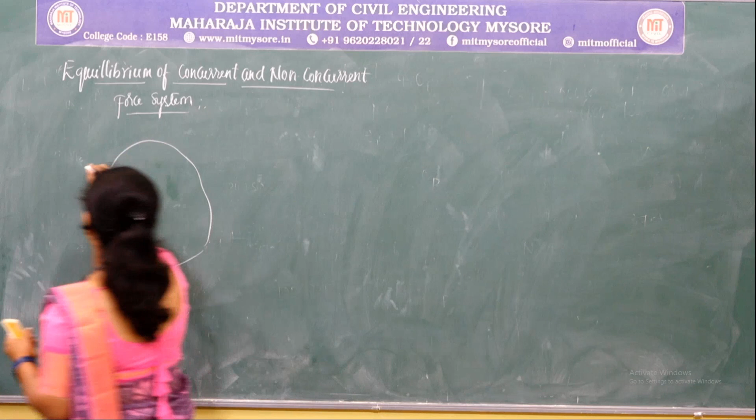So, for that, if I consider a system of forces or a body, let us consider a body. This is the static position of this body. So, I am going to apply some of the forces on this body. Upon applying these forces, if the position of this body is not altered, that means it does not move upon the acting of these forces, then this body is said to be in equilibrium.

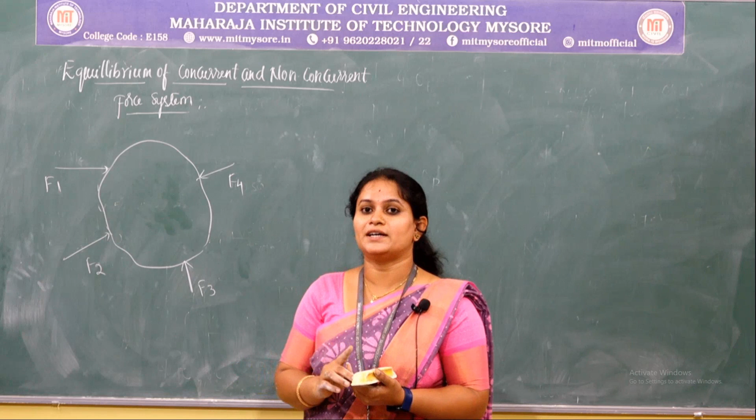So, if I consider the bodies which are in motion, the body is moving with the uniform velocity, and on applying some of the forces on that body, if the uniform velocity of that body is not altered, then that body is also said to be in equilibrium.

So, mostly this concept of equilibrium will be applied for the static bodies. So, a body is said to be in equilibrium when its static position means which is not moving, so which is at rest.

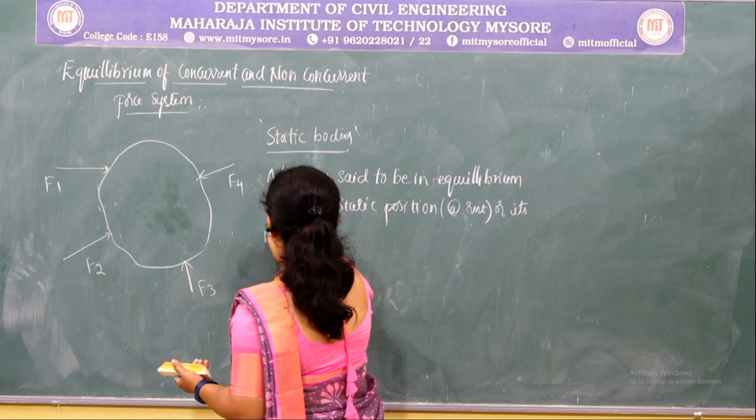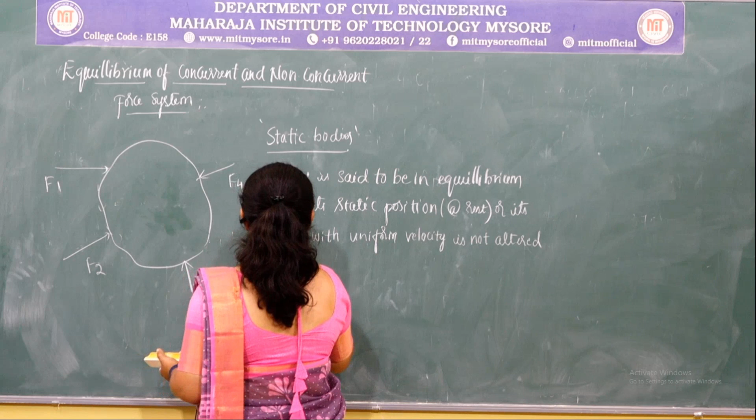When its static position or motion with uniform velocity is not altered when it is acted upon by the different forces, so this is called as the equilibrium of a body.

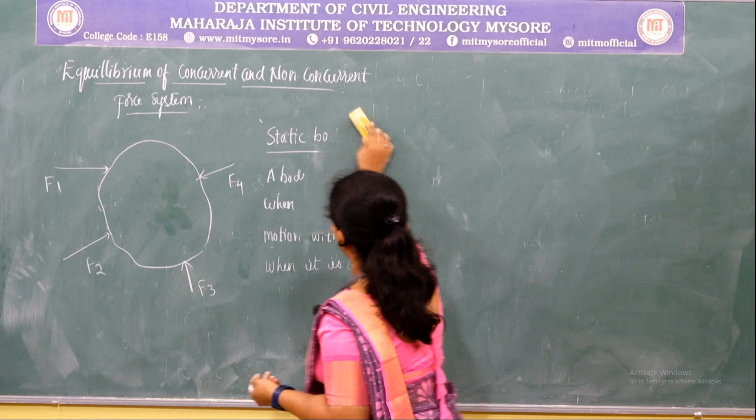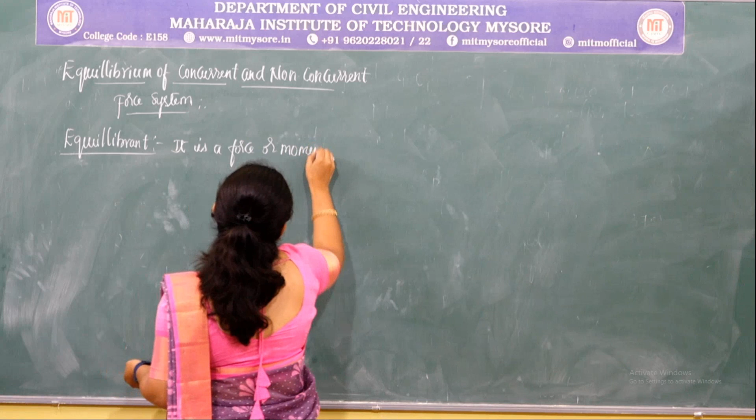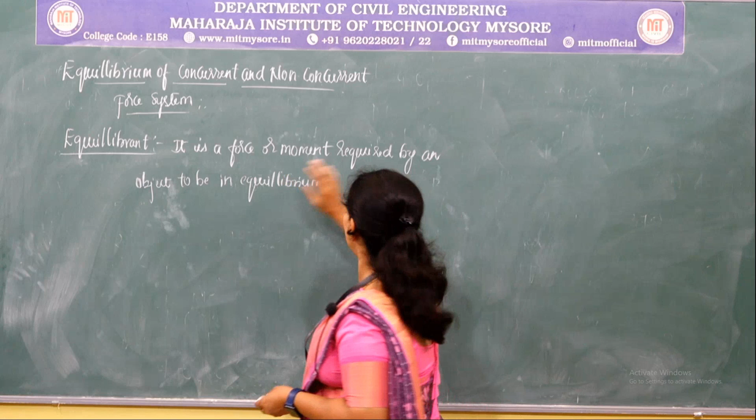Next, we shall consider the equilibrant. So, what do you mean by this equilibrant? This equilibrant is a force or a moment required by an object to be in equilibrium. So, this equilibrant is a force which is required by an object in order to keep that object in an equilibrium.

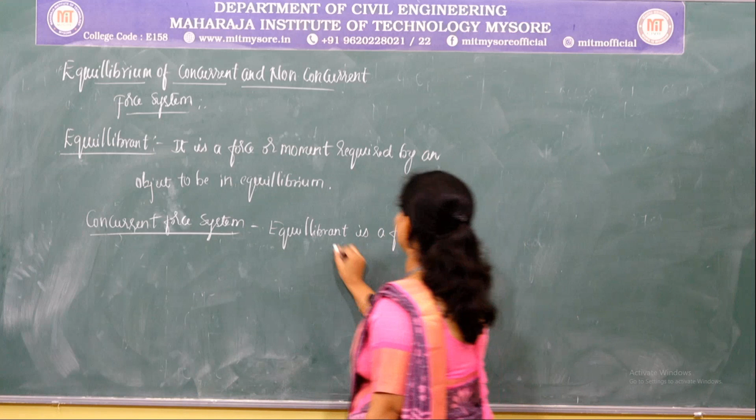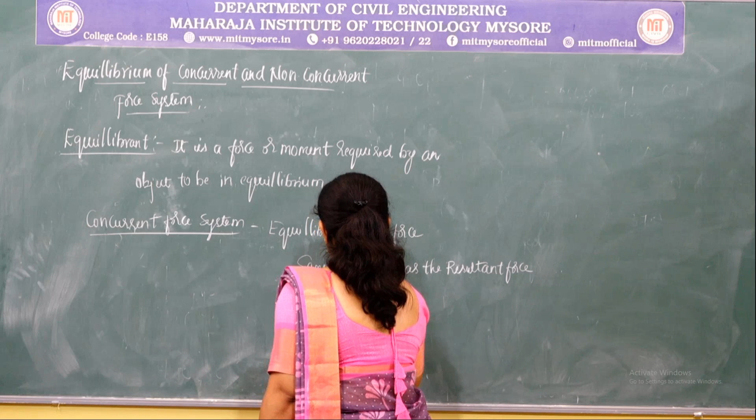So, there are two cases. One is for concurrent force system. So, for this concurrent force system, equilibrant is a force which is having the same magnitude as the resultant force, but in opposite direction. Why it is in opposite direction? Because this needs to keep the object to be in equilibrium.

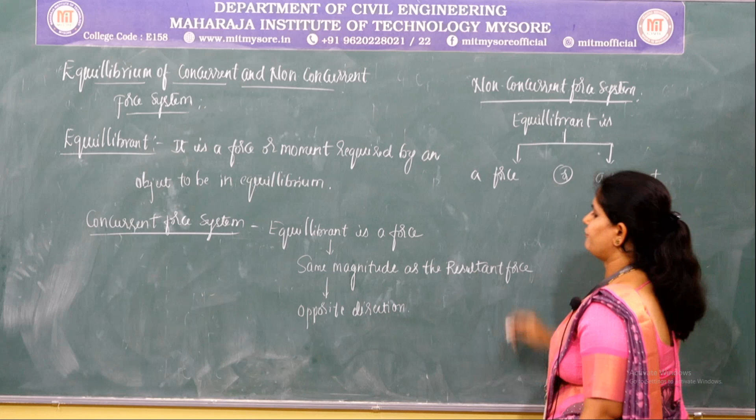So, for non-concurrent force system, this equilibrant is a force or a moment. If it is a force, this should have a same magnitude as resultant, again in opposite direction. If in this case the value of the resultant is 0, so this equilibrant may be a moment.

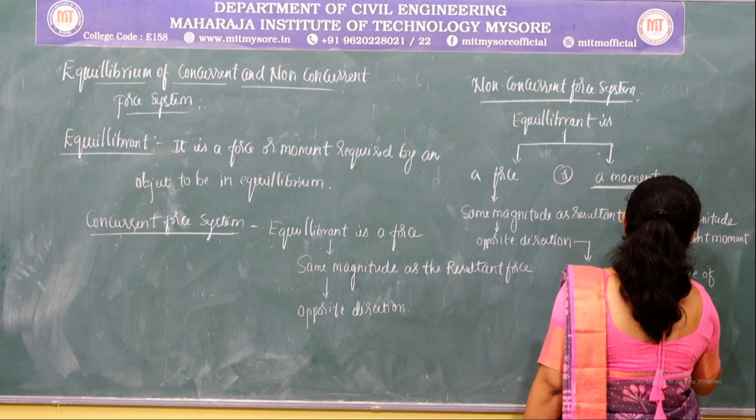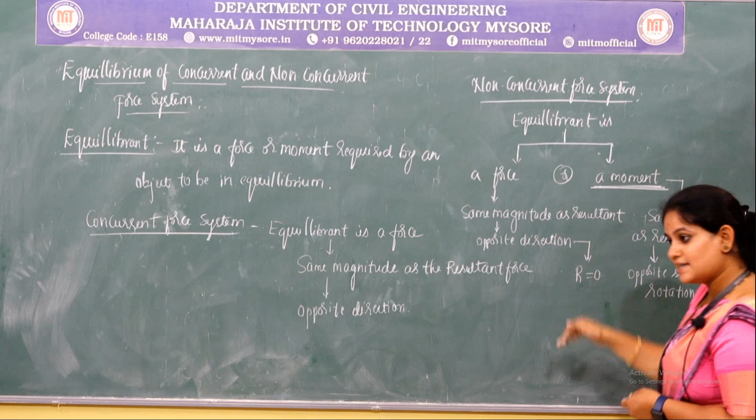Again this should have the same magnitude as resultant moment, again this should be in opposite sense of rotation. So, if the value of resultant is equal to 0, then the equilibrant will be a moment which is having the same magnitude as the resultant moment, but in opposite sense of rotation.

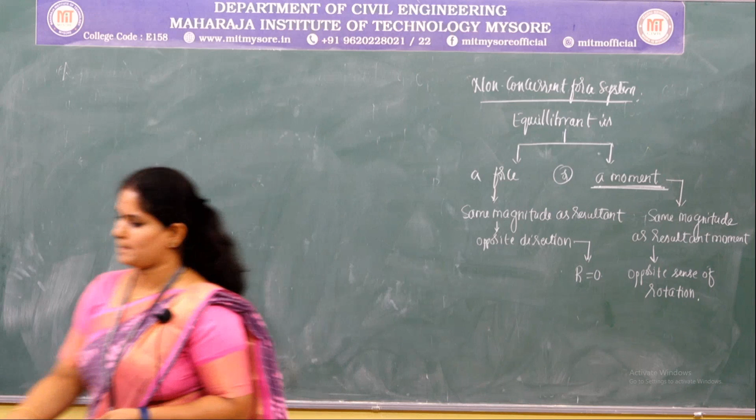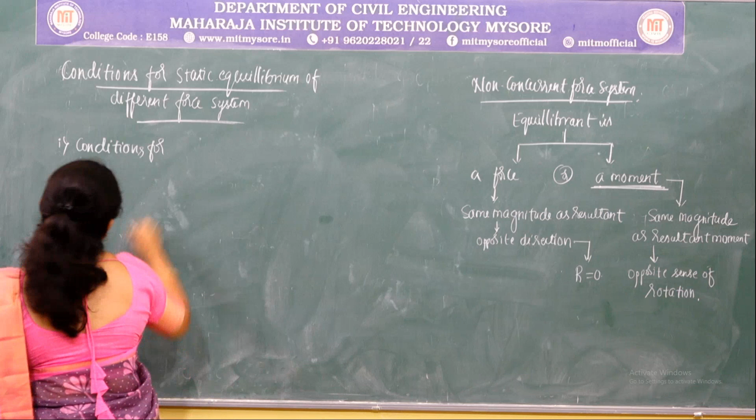So, next we shall consider the conditions for static equilibrium of different force system. So, in that the first condition is conditions for equilibrium of coplanar concurrent force system.

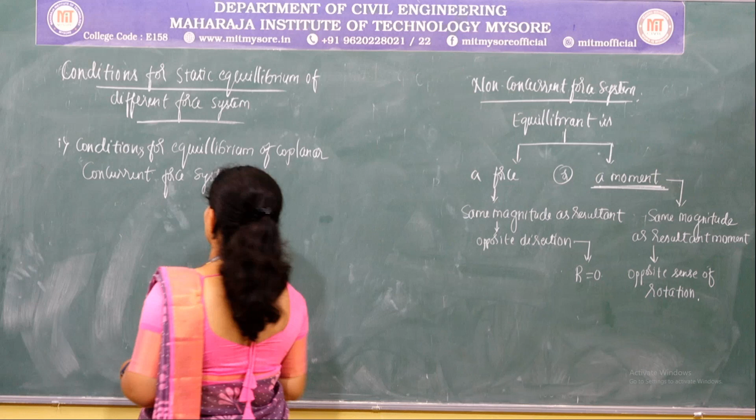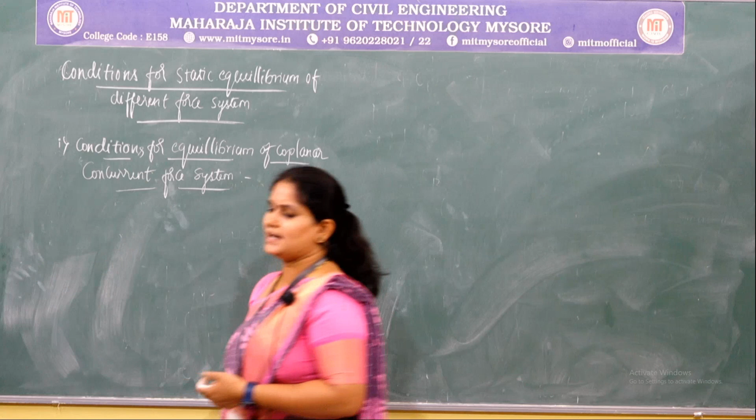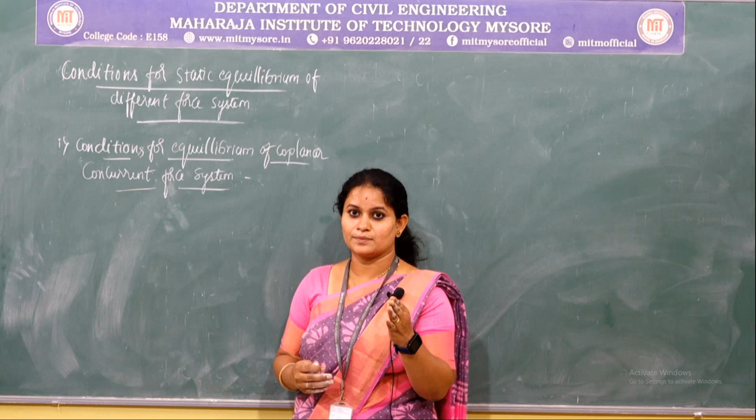So, when I am explaining about the equilibrium, I told you that in case of concurrent force system, equilibrant is a force only. So, therefore, the resultant of the concurrent force system is a force which is acting through the point of concurrence of the given system of forces, and it must be equal to 0. That means which is nothing but a resultant force.

In order to find out the resultant force, we need summation of Fx and summation of Fy. So, in order that the concurrent system to be in equilibrium, these two cases should also be in equilibrium. That means summation of Fx should be equal to 0 and summation of Fy should be equal to 0.

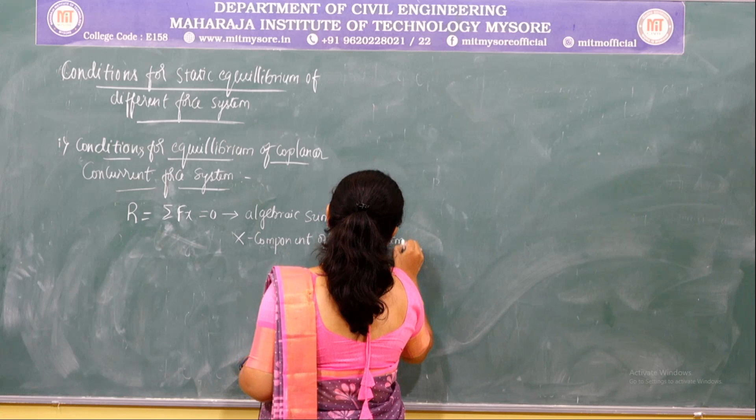So, summation of Fx is equal to 0 means that the algebraic sum of all the x components of a force system is equal to 0, and summation of Fy is equal to 0, which means that

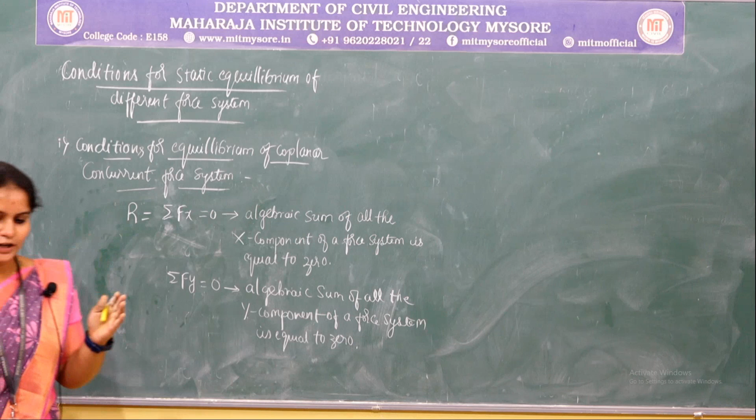the algebraic sum of all the y components or the vertical component of a force system is equal to 0. If both these components are equal to 0, then the given system of forces or the concurrent force system will be in equilibrium, because that object or the force system should not move, right.

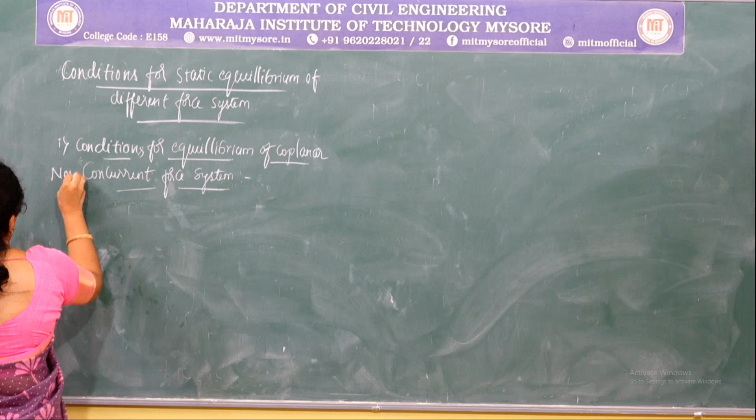Next, in the second case, we shall consider the conditions for the equilibrium of coplanar non-concurrent force system. So, again for non-concurrent force system, I told you that equilibrant may be a force or a moment. So, this will going to constitute the conditions that for force, that is summation of Fx is equal to 0 and summation of Fy is equal to 0, or if in case the resultant force is 0, this will going to constitute for the moment as a resultant.

So, that means summation of the moment should be equal to 0. So, this means that the algebraic sum of all the x component of a force system is equal to

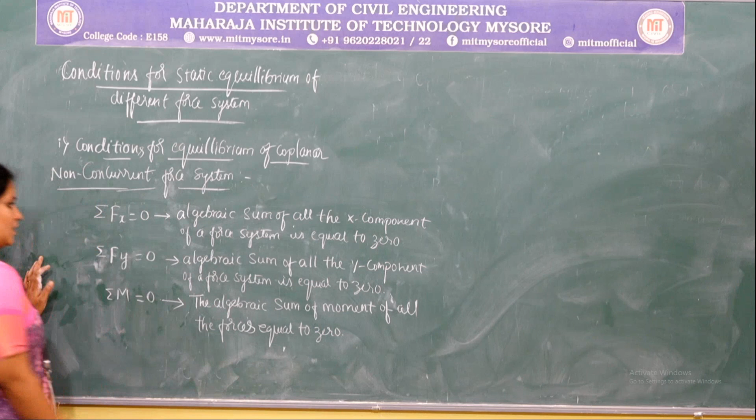0, and the algebraic sum of all the y components of a force system is equal to 0. So, summation of moment, the algebraic sum of moment of all the forces is equal to 0.

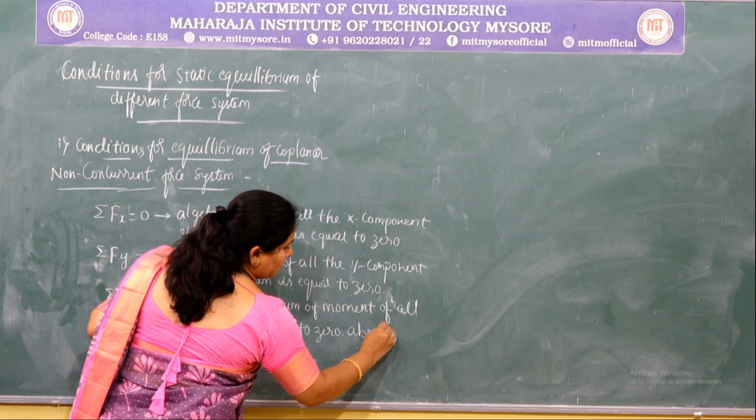Then we should use these three conditions for the equilibrium of coplanar non-concurrent force system, and should be equal to 0 about any point. So, these are the conditions of static equilibrium for different force system. Next, we shall consider the Lami's theorem.

So, we shall take up the first concept, that is Lami's theorem.

So what does Lami's theorem say? It states that if three coplanar concurrent forces are in equilibrium, then each force is directly proportional to the sine of the angle between the other two forces.

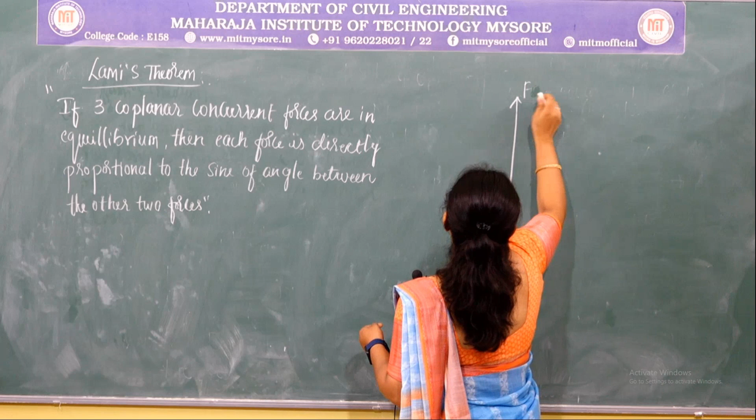So to prove this, let us consider three coplanar concurrent forces in equilibrium. Let us consider F1, F2 and F3 as three concurrent forces. The angle between F2 and F3 is alpha, the angle between F3 and F1 is beta, and the angle between F1 and F2 is gamma.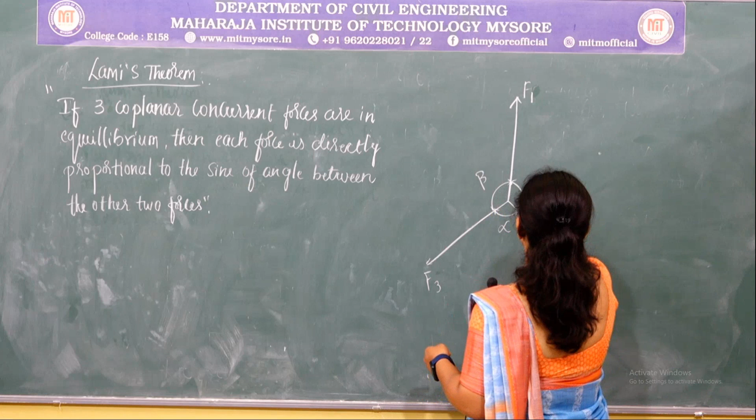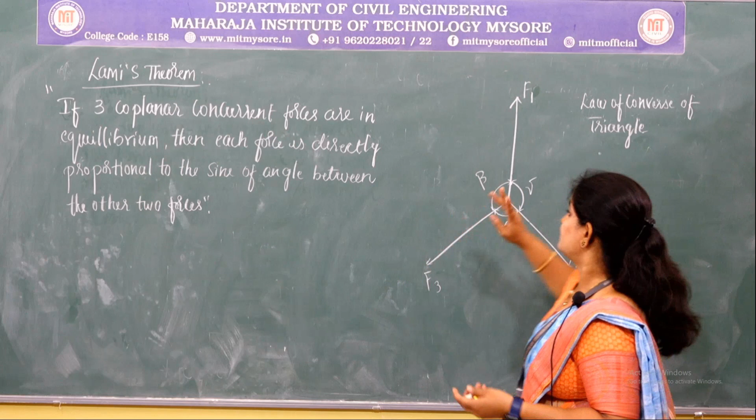When these three forces form a coplanar concurrent force system, they can be represented by the sides of a triangle, both in magnitude and direction, based on the law of converse of the triangle. This means when three concurrent forces are in equilibrium and coplanar, these three forces can be represented by the sides of a triangle both in magnitude and direction. So let us draw the figure.

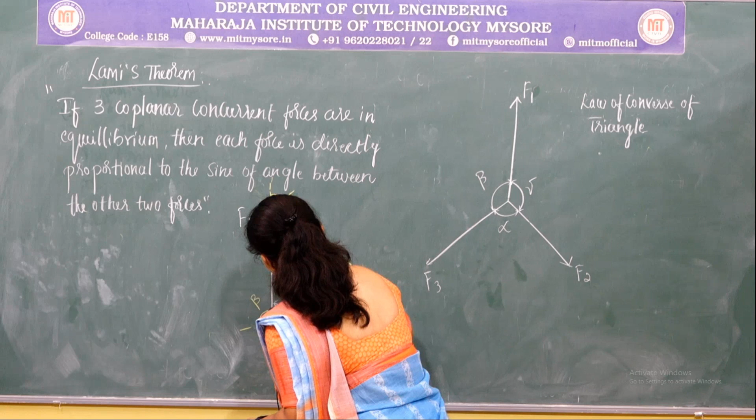So this is F1, drawn in the same direction. This is the direction of F2 and this is the direction of F3. The angle between F1 and F2 is gamma, the angle between F2 and F3 is alpha, and the angle between F3 and F1 is beta. So the interior angles: since the total angle is 180 degrees, this becomes 180 minus gamma, this becomes 180 minus alpha, and this becomes 180 minus beta. Now we shall apply the sine rule.

What does this sine rule say? If the three forces are represented as sides of a triangle, then each force is directly proportional to the sine of the angle between the other two forces. So we shall apply the sine rule for this figure 2.

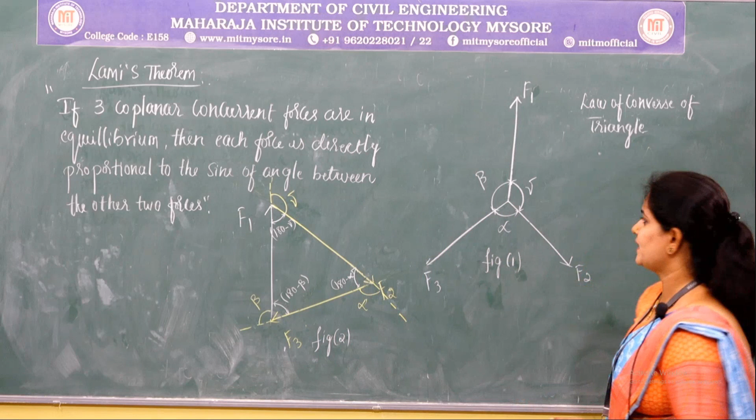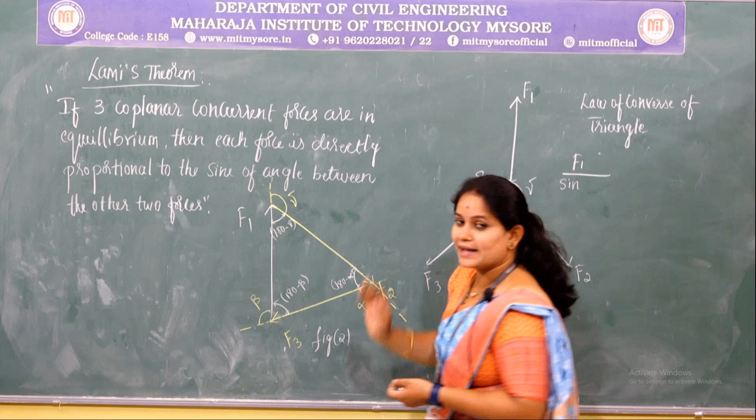On applying the sine rule for figure 2, first consider the magnitude of the first force, F1. This F1 is directly proportional to the sine of the angle between the other two. What is the angle between the other two forces now? For F1, we consider the angle between F2 and F3, which is 180 minus alpha.

Similarly, consider the second force F2, which is directly proportional to the sine of the angle between the other two. Now considering F2, I need the angle between F1 and F3, that is 180 minus beta.

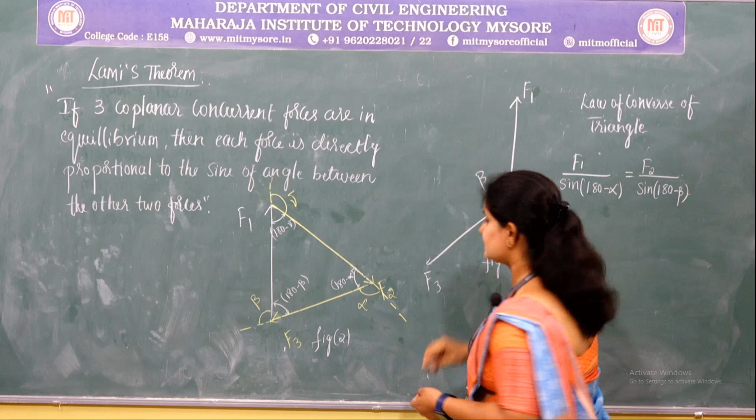And this is equal to the next force, F3. Considering F3, I need the angle between the other two forces, F1 and F2, that is 180 minus gamma. So this is equal to some constant.

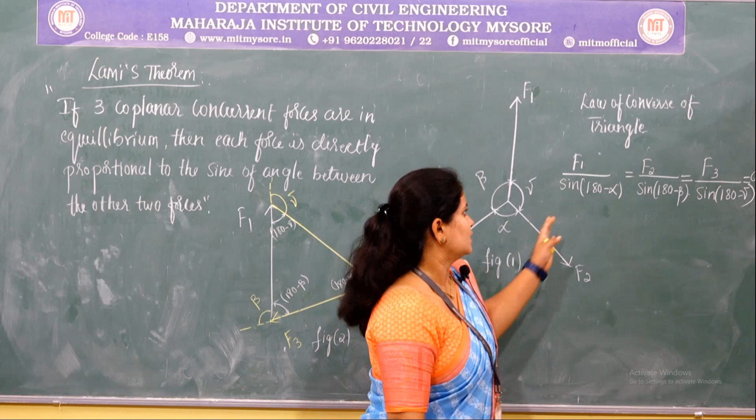So what is sine of 180 minus alpha? It is sine alpha, which is equal to F2 divided by sine of 180 minus beta, which is sine beta, and F3 divided by sine gamma, which is equal to some constant.

So this can be written as F1 is equal to some constant multiplied by sine alpha, or F1 is directly proportional to sine alpha. Similarly, F2 is directly proportional to sine beta, and F3 is directly proportional to sine gamma. Hence proved.

Which means to say that if three coplanar concurrent forces are in equilibrium, considering F1, F2, F3 as the three forces which are coplanar and concurrent, each force is directly proportional to the sine of the angle between the other two forces.

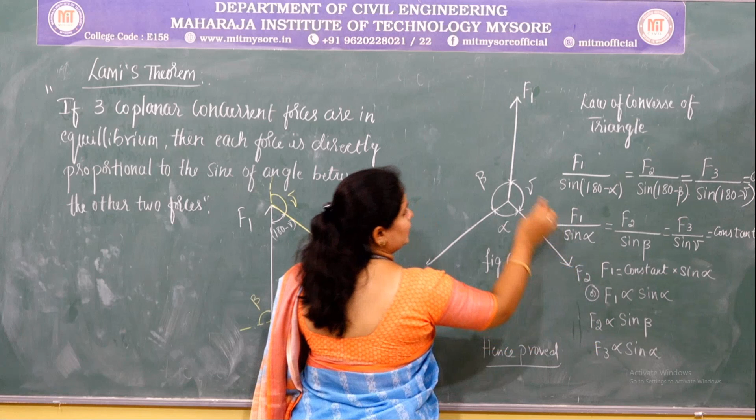Observe here in figure 1, if I consider F1, this is directly proportional to the sine of the angle between the other two forces, that is alpha, and F2 is directly proportional to the sine of the angle between the other two forces, that is beta, and F3 is directly proportional to the sine of the angle between the other two forces, that is gamma. Hence Lami's theorem is proved.

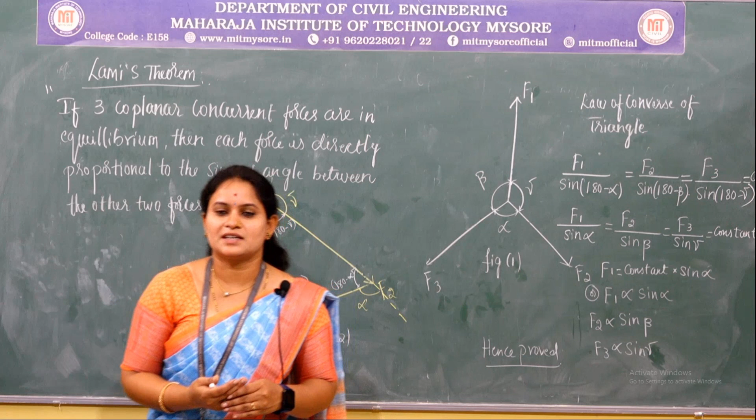So let us discuss the next topic, that is the free body diagram. What do you mean by a free body diagram? The free body diagram of a body, or a part of a body, is the diagram which shows all the forces acting on the body, keeping that body in equilibrium, including the support reaction at the restraint point and the self weight of the body. So what is a free body diagram?

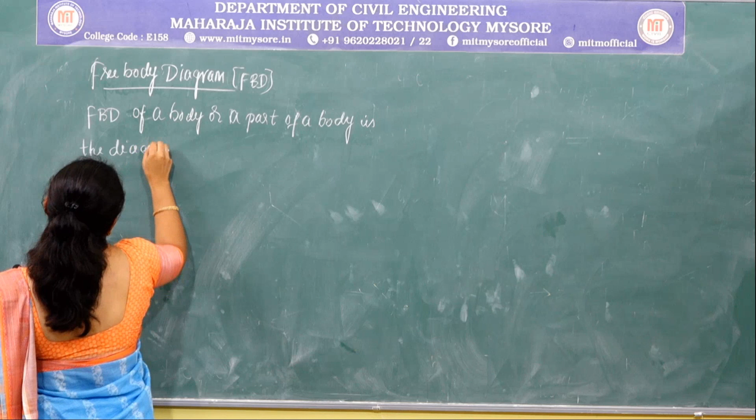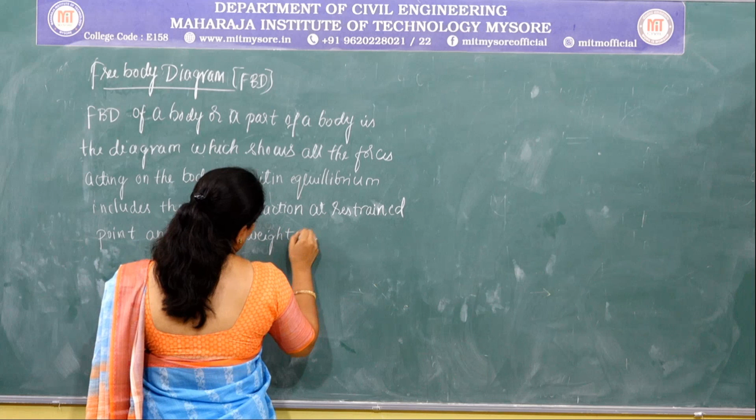Free body diagram, which can be written as FBD, of a body or a part of a body is the diagram which shows all the forces acting on the body, keeping that body in equilibrium, which includes the support reaction at restraint points and also the self weight of the body. So, in order to explain this free body diagram, let us take up one example.

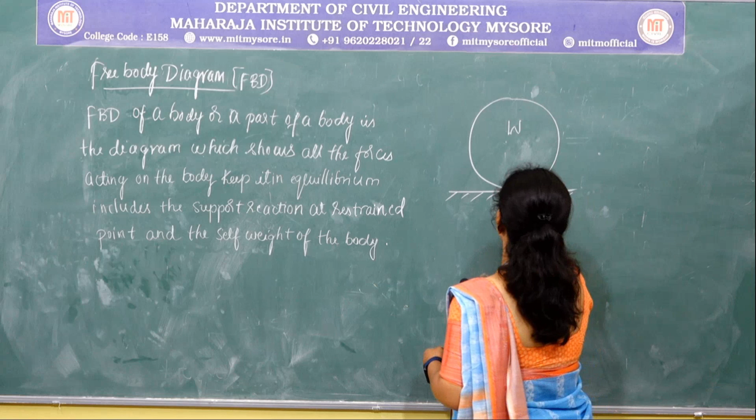Let us consider a sphere which is having the self weight of W and supported by a smooth surface at point A. If this sphere is not supported by this surface, this sphere would have sunk into the surface. That means the motion of this sphere is restricted by this surface at point A, that is, this sphere is applying some action towards this surface. For the action developed, this point on the surface is developing the same reaction towards this sphere.

So this point is called the restraint point, and the reaction developed towards the sphere is called the support reaction, or it is also called the normal force or the reaction force. So the free body diagram of this sphere can be written as: the self weight of the body will act in vertically downward direction, that is W. This point is restricting the motion of the sphere at point A, hence the surface is developing some reaction towards this sphere. Hence, at point A, there is a support reaction developed which can be represented as R, that is reaction at point A.

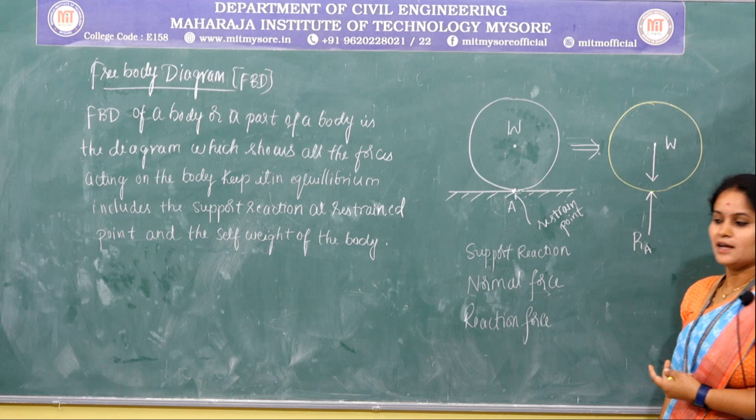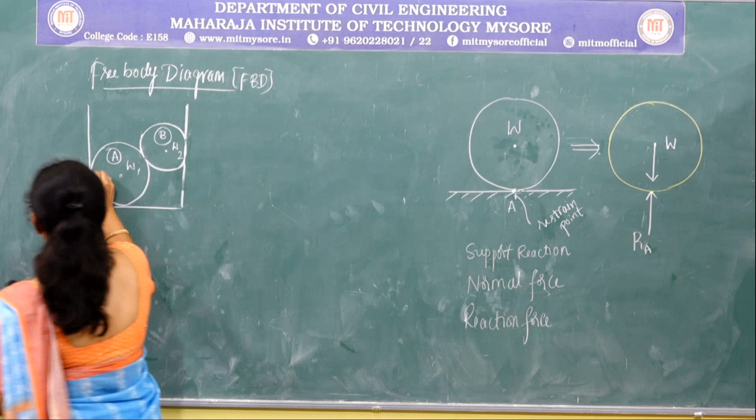Let us consider again the second example. Let us consider a trough inside of which there are two spheres, this as sphere A and this as sphere B. The self weight of this sphere is W1 and this sphere is W2, and it has restraint points, and also there is an intermediate restraint point between these two spheres. So totally there are 4 restraint points.

So at A, B and D, this trough is restricting the motion of these two spheres. At point C, the motion of sphere A is restricted or restrained by sphere B. Similarly, the motion of sphere B is restricted or restrained by sphere A. So let us consider the free body diagram of these two spheres separately.

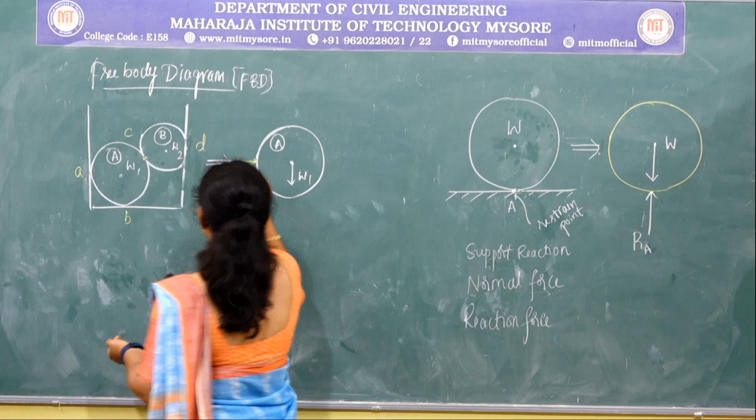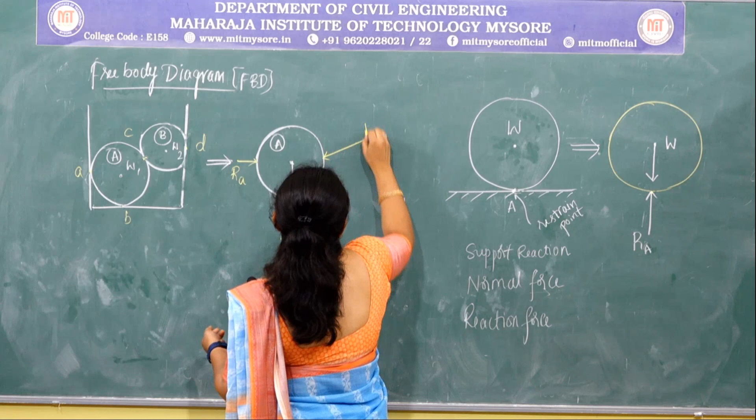Let us consider sphere A. The self weight of the sphere is W1, which will act in vertically downward direction, and this sphere has 3 restraint points A, B and C. The reaction developed by the trough towards this sphere at point A is horizontal, and this is RA. At point B the reaction developed by the trough towards the sphere is RB. At point C the orientation of the sphere is inclined, so therefore the reaction developed by sphere B towards sphere A is also inclined, and all these reactions or forces will pass through the point of concurrence.

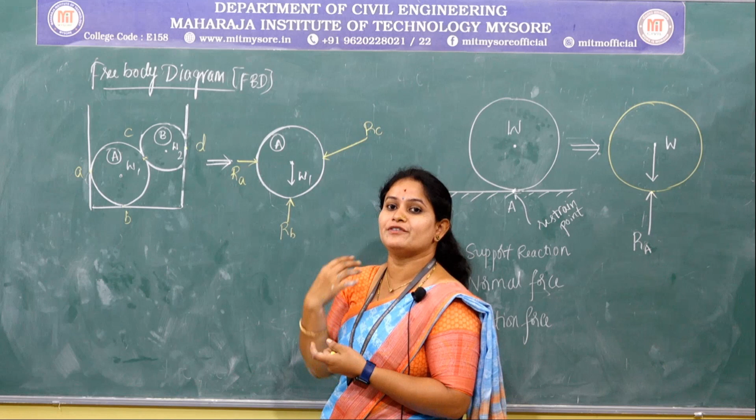So this again can be written as: this is the point of concurrence, let us consider this as point O. One is the self weight which is acting in vertically downward direction. Next, the reaction at A which is acting towards the right, that is RA. And at point B the reaction is vertically upwards, that is RB, but at point C the reaction developed is inclined and the direction of which will lie in the third quadrant.

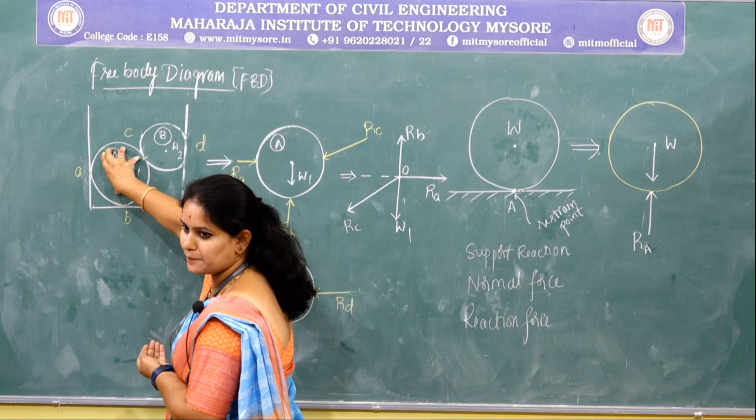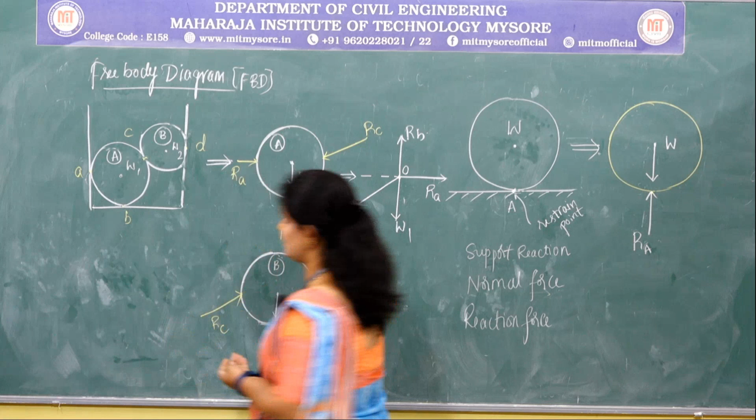Next, let us consider sphere B. The weight of which is W2, which will act in vertically downward direction. Next, at point D, the reaction developed by the trough towards the sphere is RD and it is horizontal. Again at point C, the motion of sphere B is restricted by sphere A, and the reaction developed is towards sphere B at point C, so that is RC. This again can be written through the point of concurrence. All these forces should pass through the point of concurrence only.

So the self weight will act in vertically downward direction. Next, at point D the reaction is towards the left, and at point C the reaction developed is inclined, so that is RC.

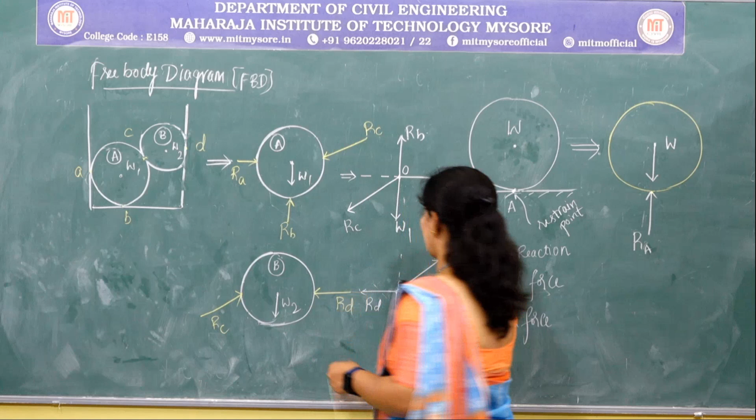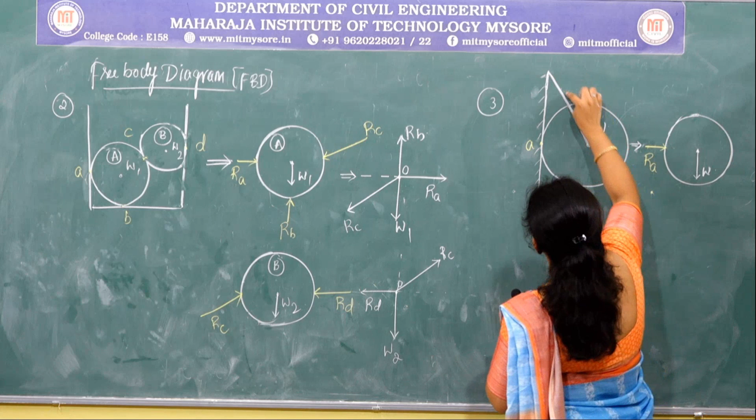Next, let us consider again a sphere with a tensile wire or tension wire. Let us consider a sphere which is supported by a smooth surface and a tensile wire. The self weight of which is W. So if I write the free body diagram of this sphere, first the self weight will act through the centroid point and it will act in vertically downward direction, that is W. This smooth surface is supporting or restricting the motion of this sphere, that is, it will develop a reaction force at A, that is RA, and there is a tension wire or cable which will develop a tensile force.

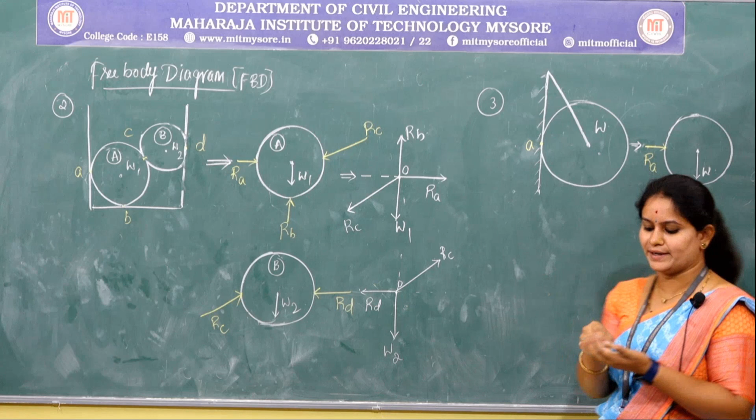We know that the tensile force will always act in the outward direction from the point, developing a tensile force T. So we can write all these reactions through the point of concurrence: this is W, this is the tensile force, and the reaction RA is acting towards the right. So this is the general free body diagram of this sphere.

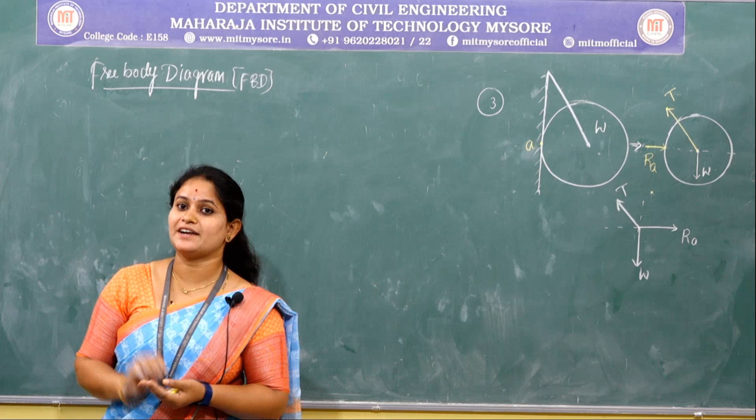Next, let us consider the free body diagram of a ladder. The reason it needs to be represented through the point of concurrence is that we need to keep that body in equilibrium.

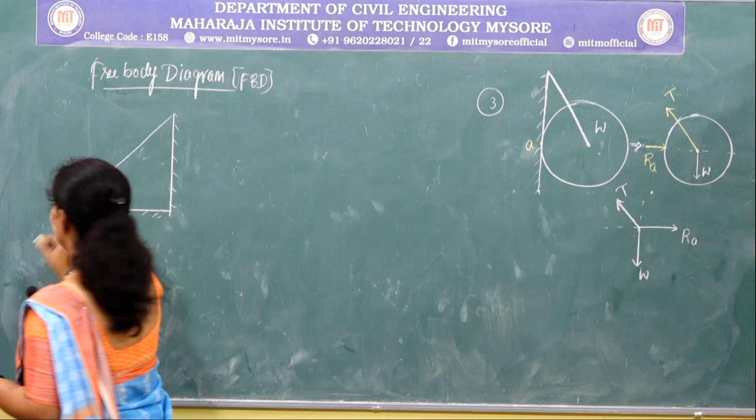At point A, the sliding action of the ladder is restricted by this point, or the reaction is developed by this surface towards the ladder, which acts vertically upwards and can be written as RA. There is also an external force P acting at point A, which is horizontal.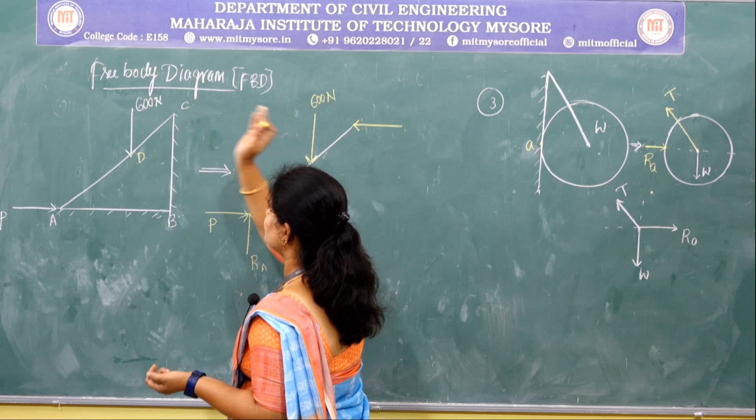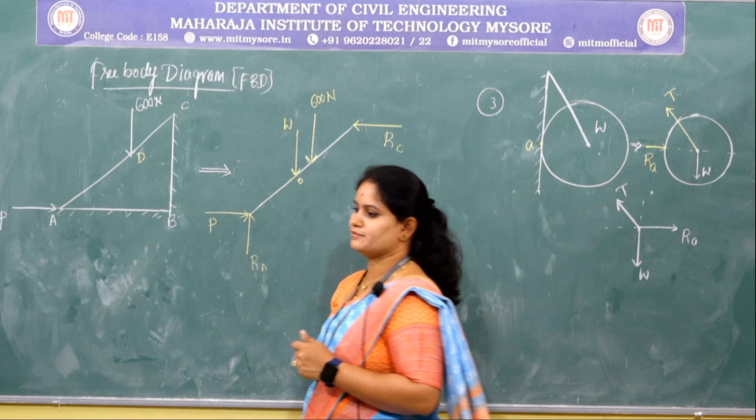At point C, the sliding of this ladder is restricted by the wall, meaning the reaction developed is towards the ladder from the wall. This can be written as RC. Another force is the self weight of the ladder, which acts through the centroid point of the ladder, and that is W. So this is the free body diagram of the ladder.

Now let us consider some important points before solving the problems on these equilibrium conditions.

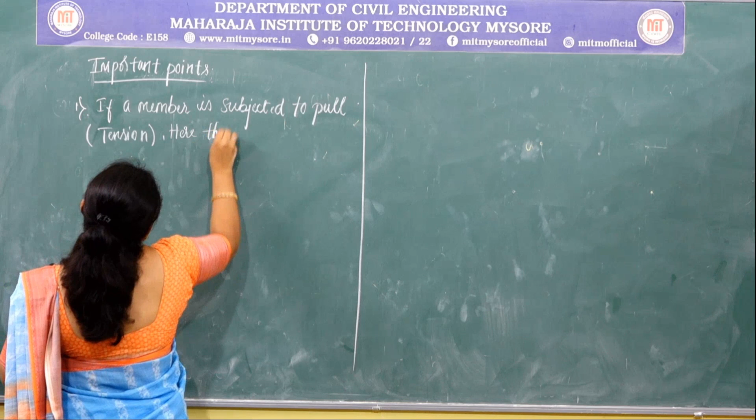The first point: if a member is subjected to a pull, it may be called a tension force. Here the reaction R will act away from the end, then we can say that they are in tension. If I consider a member AB and it is subjected to a pull, that means subjected to this kind of action, the reaction developed will be away from this point, away from this point.

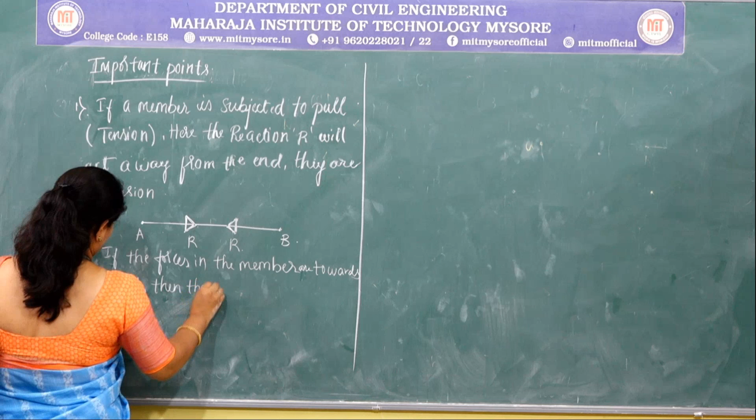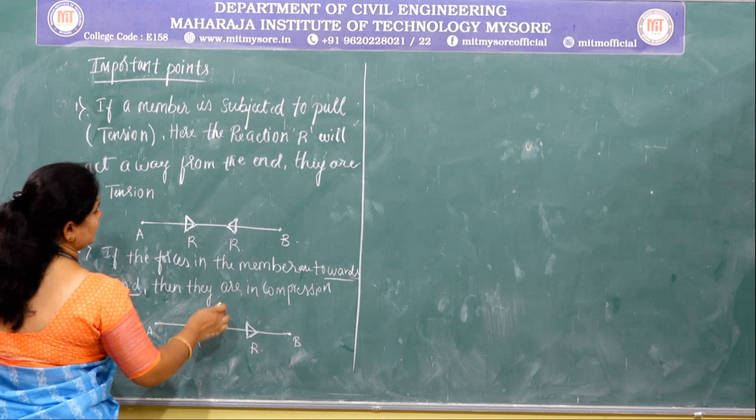Second point: if the forces in the member are subjected to a push, that is compression, or the forces in the member are towards the end, then they are in compression. Let us again consider a member AB. If it is subjected to a push, then the reaction developed will be towards the point, acting towards the end. Then this member is said to be in compression.

Next, let us consider the third important point. Strings, ropes, cables, wires, and chains are always subjected to the tensile force only.

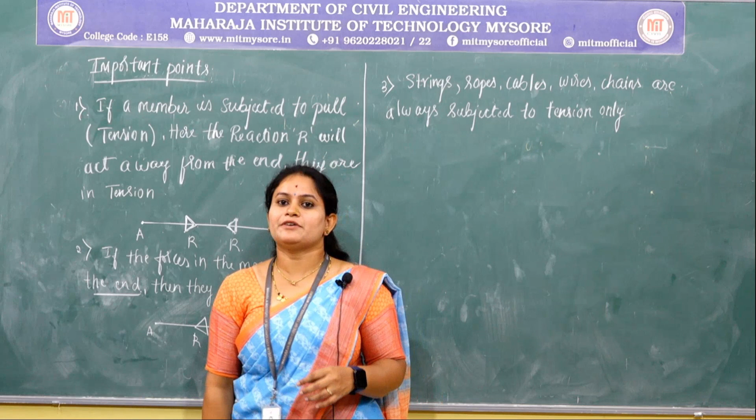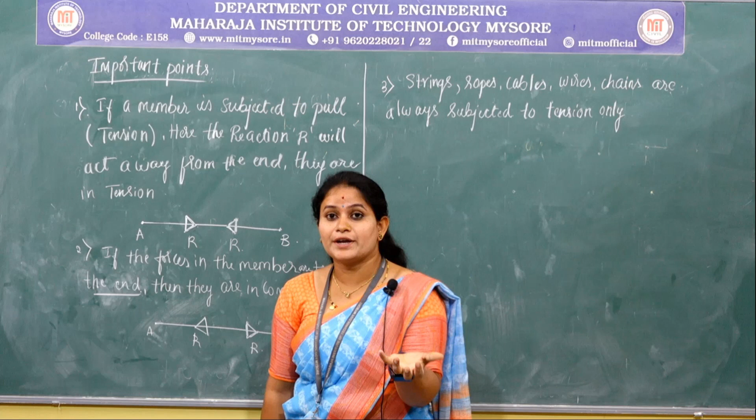As I explained in the free body diagram, if you consider a wire or a cable which is held by the sphere, that cable will always be subjected to the tensile force only, which will act away from the end.

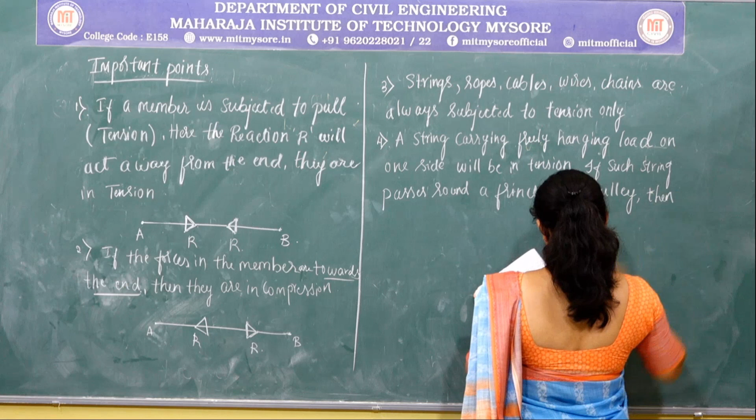Next important point: if a string carrying a freely hanging load on one side will be in tension, if such a string passes round a frictionless pulley, then there will be a tension on either side, that is, on both sides of the pulley the tension remains the same, as shown in the below figure.

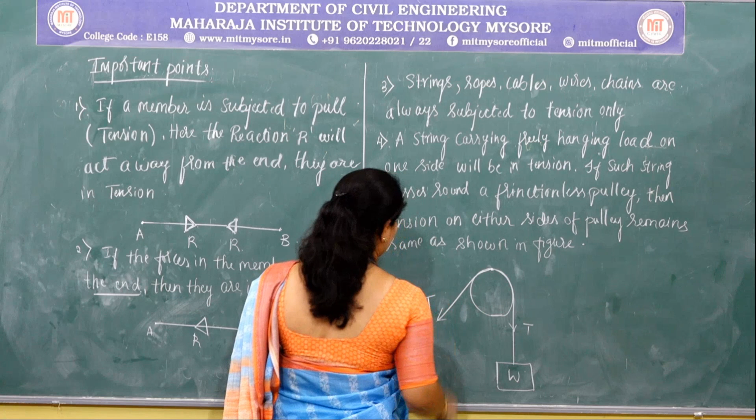If I consider a pulley and a freely hanging load, let us consider this load as W on one side, then this will be in tension, and if this string passes through a frictionless pulley, then on both sides there will be a tension that remains the same as this weight. From this point the tensile force will always act in the outward direction, and again from this point the tensile force will act in the outward direction. This is the string, and this is called a frictionless pulley. Hence the tensile force will be equal to the freely hanging load.

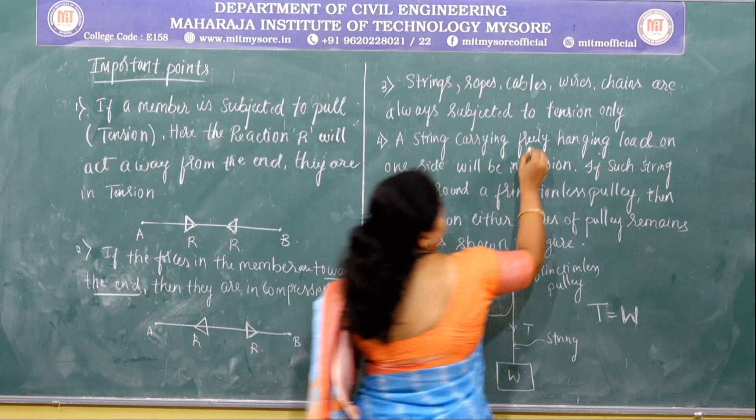Next, reactions are directed towards the centroid of the body in order to maintain the equilibrium.

Next point: the self weight of any body will always act in the vertically downward direction towards the centroid of the body. So these are all the important things we should keep in mind before solving any problems on equilibrium of forces.